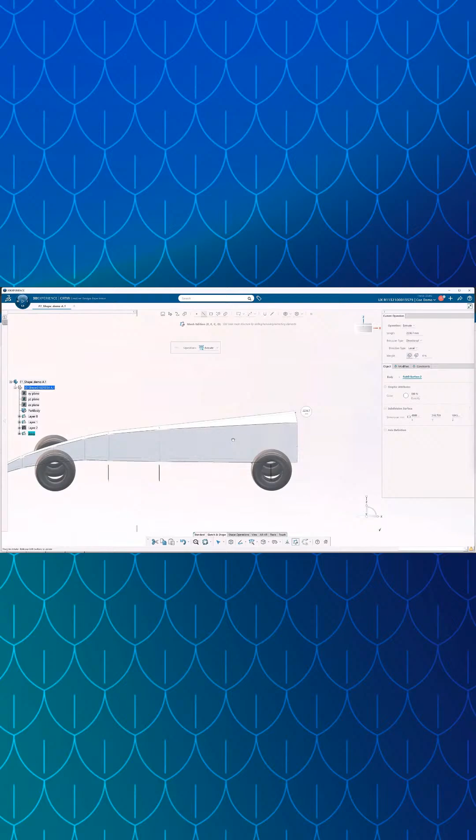This application is dedicated to early stage concept design because it combines subdivision surface technology with intuitive tools. Designers and modelers can create high quality 3D shapes from scratch with freedom during creation. We can start with a simple context like the wheel position, and also from a box primitive that you'll be able to deform using manipulation commands.

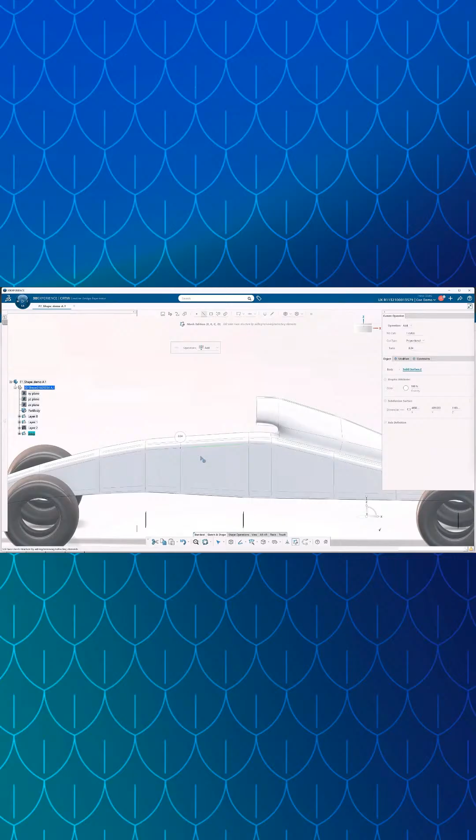Here you'll be able to sculpt the base mesh interactively, and the subdivision will be detailed progressively. The shape will evolve naturally while designers and modelers keep full control over the proportion and flow of their surfaces. For fast exploration and refinement, you can use the gesture-based tool that accelerates your workflow, since you can select vertices and quickly sculpt the shape and make adjustments quickly.

You can see that the full body of the Formula One was created with a symmetry modifier, which allows you to create only one side of the product and see the overall shape at the end. So here the concept model is complete, and it will be the base and reference for the next step of the design phase.

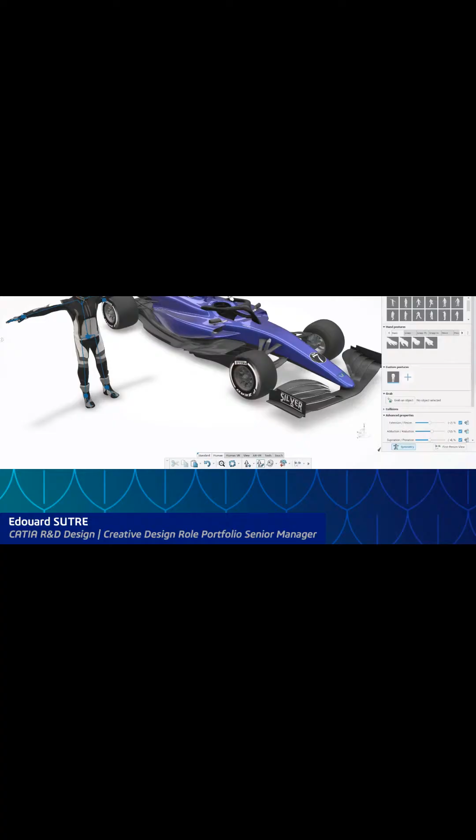We can start to imagine the cockpit inside, and I'll let Edouard show us that. Now we'll talk about the virtual mannequin. In most of our CATIA roles, you have access to an application called CATIA Human Design, and it's on purpose - we are convinced that having the virtual mannequin available for all designers will be key for the future and for doing the best design possible.

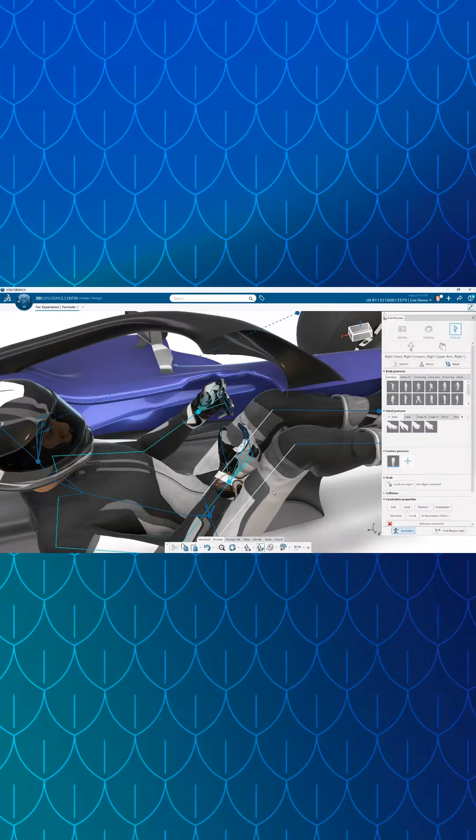The idea is to propose an easy-to-use and flexible mannequin available in the project, representing the driver, the pilot of the Formula One. You can easily drag in 3D some interesting key points to put the mannequin into postures that represent the use cases we have to serve in order to design around this reference. Same also for the visibility line.

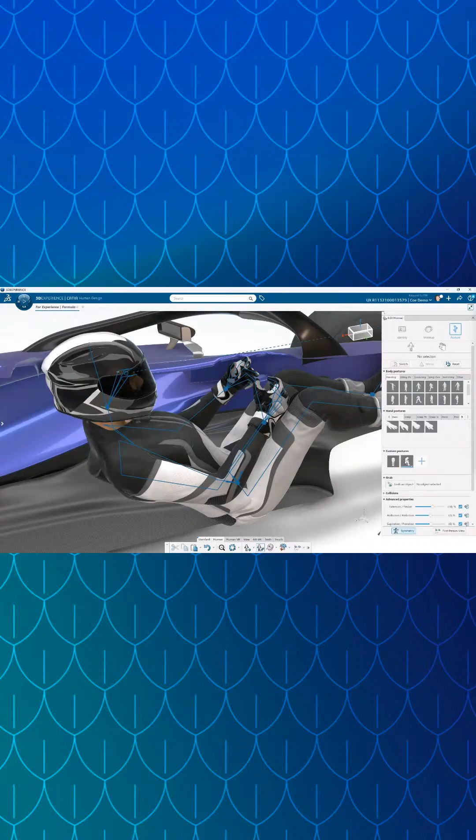With one button, we can have the first-person view access in order to visualize what the driver will see. We can also capture different postures to challenge our design all over the project with these different postures. And then the mannequin is ready.

I also want to show you what the new web widget, Creative Portfolio Board, is meant to be used for designers.

So to start the ideation phase, once you have all the context created, you can use a Creative Portfolio Board and ask Aura, our conversational agent available directly on the 3DEXPERIENCE platform, to provide the latest Formula One regulation rules related to the steering wheel.

This gives us access to up-to-date information, and we will be able to create the full design brief based on key technical constraints, such as the size and safety requirements of a steering wheel. So at this first step of the design, we keep these real constraints in the process.

You can copy-paste them inside the Creative Portfolio Board, but also add images to create mood boards using templates to organize your images by theme or by color. This helps us make sure our steering wheel will be very close to the real needs, for example the different functions and buttons that we will need.

At one point, I can also insert the first sketches that are ready inside the board and use a compare command, placing the two concepts side by side. This helps us evaluate options and make better decisions. With the icon, we can select the concept we want to continue, but this time in 3D. It's a good tool for designers and modelers to understand and collaborate all along the project.

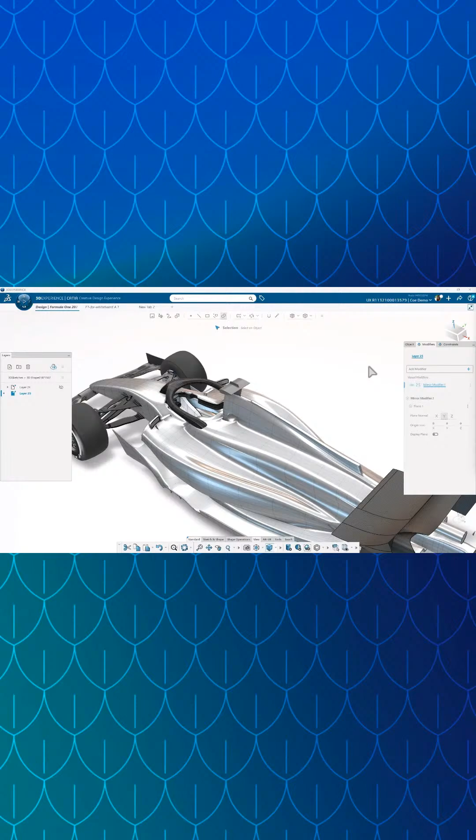I want to position inside the Formula One to have the best visibility while I sketch. So here I'm using the clipping tool to create a section in the Formula One body, taking the pilot's point of view to design my steering wheel.

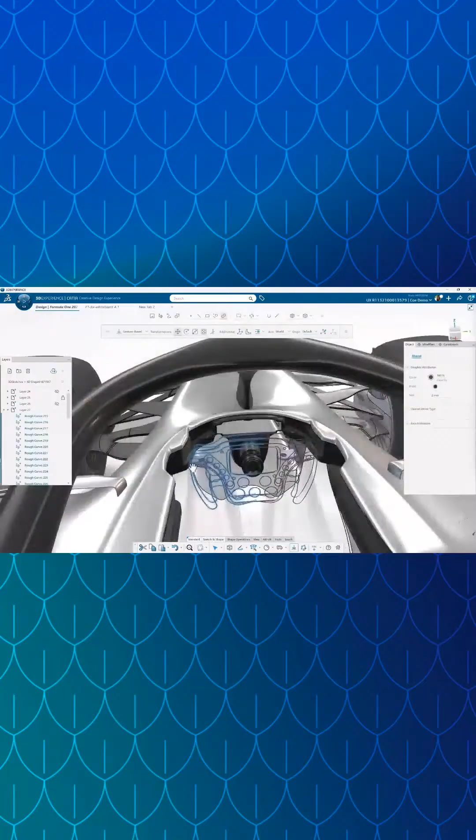Here I can place a drawing plane in 3D space and start 2D drawing directly in context. I can choose the colors and thickness of my sketch, quickly move these sketches in space, and continue to change my point of view to create the full sketches in 3D.

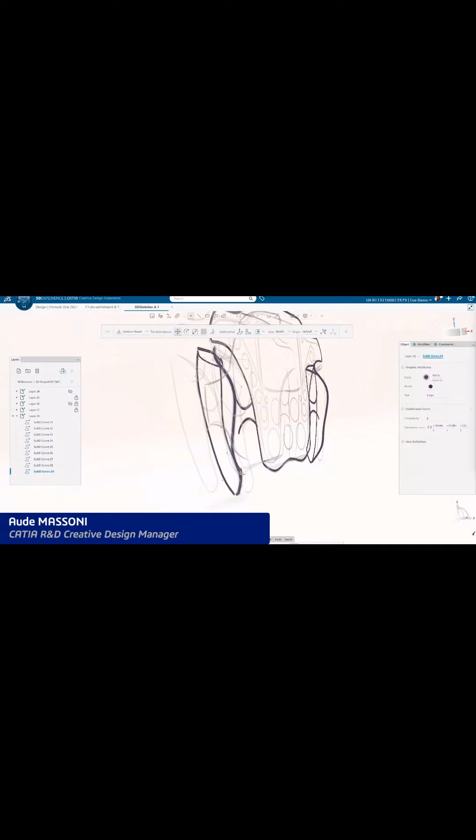Once it's done, I can switch to subdivision curve technology. These are real CATIA curves that I'm drawing here, and I can combine multiple curves to create a complex shape and refine, for example, some area of the handle with the manipulation command. You see, it's very fast, but also precise.

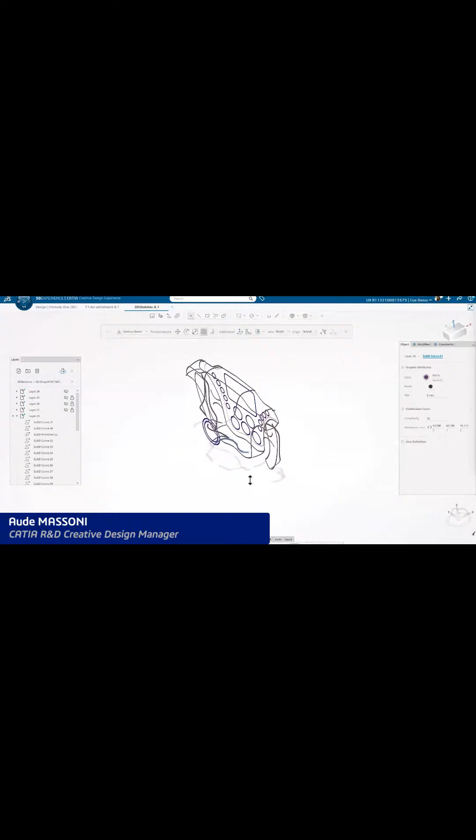I can change the point of view and sketch on different drawing planes to create a full 3D sketch network. Here I'm also using some primitives to define the buttons, and designing the position of the screen of the steering wheel, as well as the connection that I will need to the rest of the cockpit at one point.

With the 3D sketch directly integrated inside the Formula One cockpit, I can have a clear and realistic view of my concept. This allows us to quickly assess the design quality and the first level of ergonomics, and also to check technical feasibility before moving to the surface modeling.

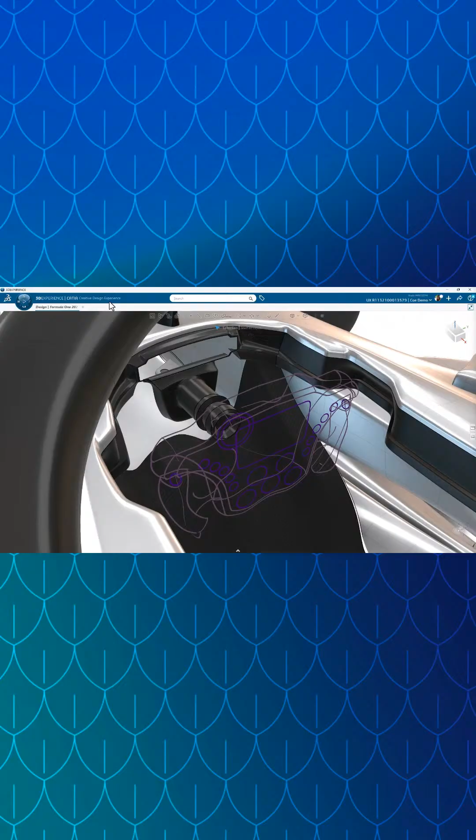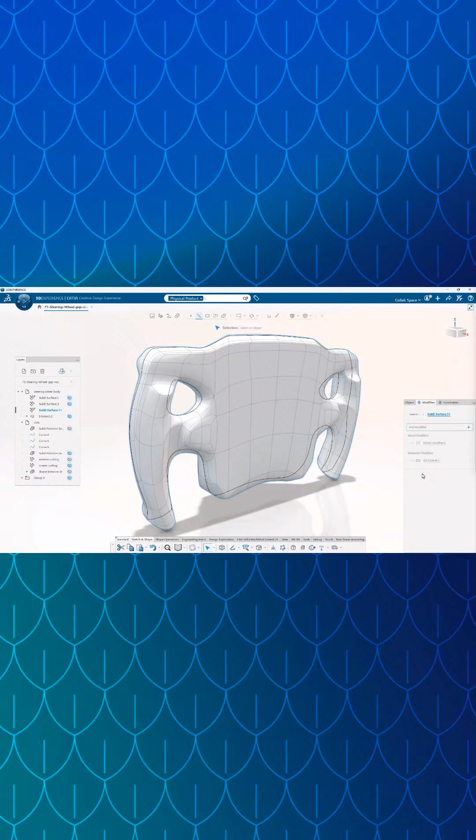To switch from the 3D sketch to the concept model, I use the same command as for the Formula One body design. Here I want to focus on some new modifiers that we propose in our application, which allow designers and modelers to enter the refine step of their concept with more control and flexibility.

Here I'm using a gap modeling modifier that will allow you to automatically create gaps on top of your surface using simply some input curves.

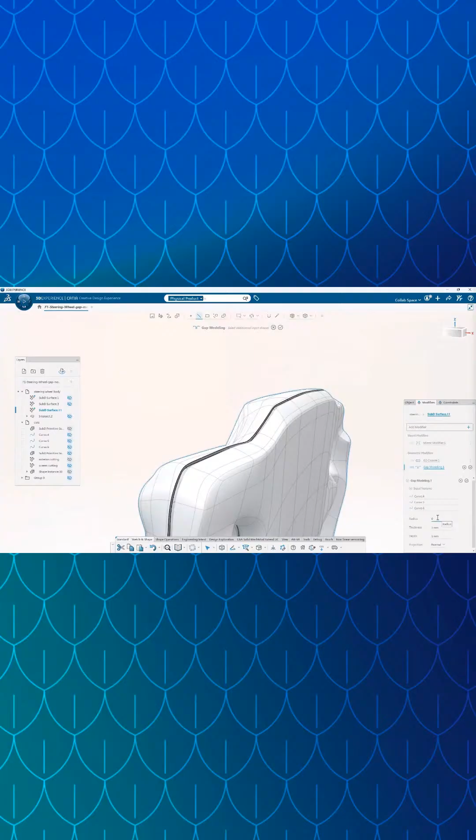So here I selected a bunch of curves that are close to my shape, and you can see it automatically proposed some gap modeling. I only need to enter the parameters I wish to have, like the thickness, the depth, but also the fillet radius that will follow the edge of the gap.

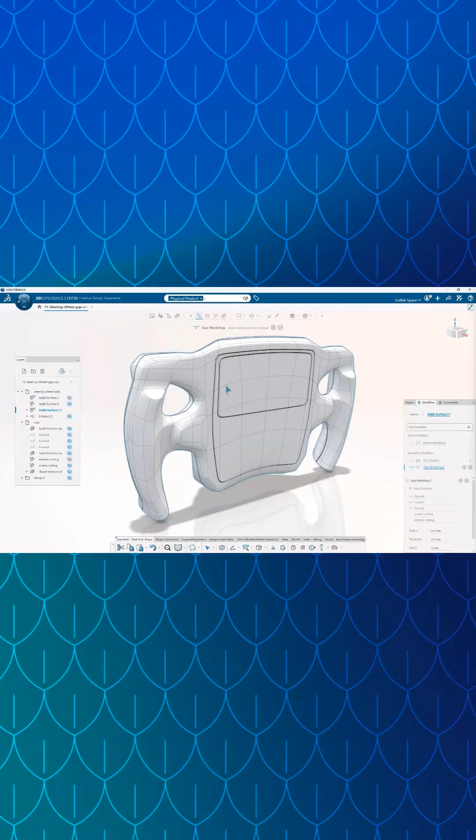Because it's a modifier, you can at any time edit it, for example to add new cutting inputs. Here I'm adding two new surfaces to define the area where I want the steering wheel screen display. And because everything stays associative all along the way, I can show back my input features and go into manipulation.

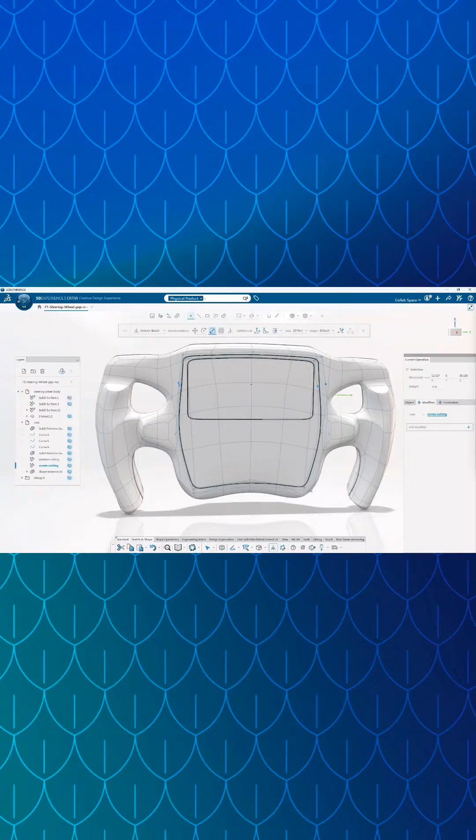Here I will select some key vertices on the shape and scale it down a little, and you can see it will automatically update the cutting and the gap will be regenerated automatically. So it's saving a really big amount of time for designers, and they can focus on exploring their ideas and design variations by simply adjusting these parameters. It's very fast and flexible for the need.

For this project, we also tried to prepare additional templates in order to add a lot of details in a short time frame. For that, we used CATIA visual scripting.

So here, for example, the idea was to prepare some primitives on the steering wheel. Sorry, Aude? No problem, I can show it after.

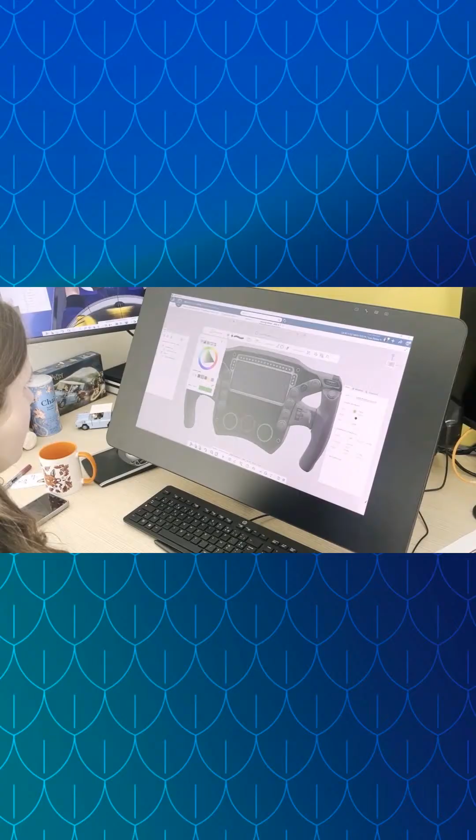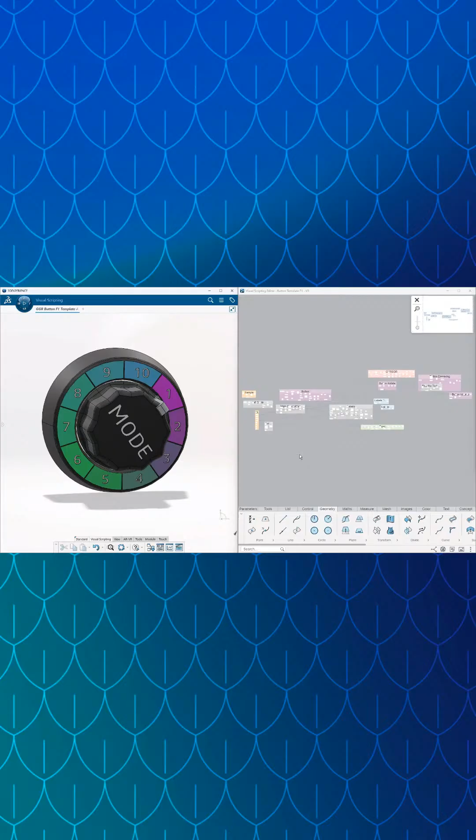So in the story, Aude, the creative modeler, has created some circles in order to represent the positions of the different buttons. And in CATIA visual scripting, we have prepared a template, a parametric model driven by a lot of parameters in order to capture the best practices and modeling techniques.

Visual scripting is a visual programming language offered to CAD and CATIA users and designers in order to prepare generative models, really robust with a lot of logic inside, in order to be used as potential templates.

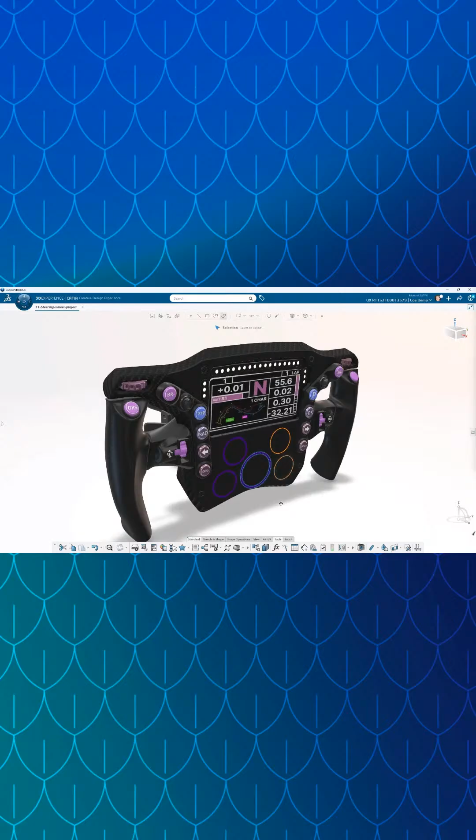Here you can see that Aude was able to simply reuse from catalogs and libraries the existing templates, and you have this kind of interface. This is similar to Power Copies and user features in CATIA, in order to instantiate them with a direct access to input selection and parameters.

You can see we just have to select the different circles, and the template will automatically adapt to the different sizes. We can enrich the model quite easily using this design sequence approach made with CATIA visual scripting.

What is also interesting, you still have access to the main parameters of the templates using this experience view, tailored for designers with a simpler kind of interface, access to different parameters such as colors, the number of quadrants you want, or even the word you want to put on the button. And you can even capture design variants through this interface.

Thanks. Yes, I will just go back here to show you how we use also all along the project still a 3D portfolio board.

So here we wanted to do a design review with Edouard. We were able to integrate, for example, a first 3D sketch inside portfolio board, and you can visualize your model, turn around, and also do some measurements in it.

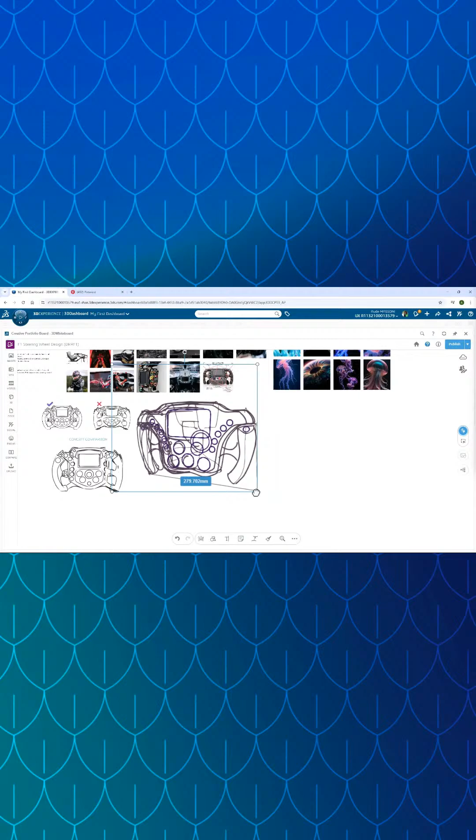It's also very nice to create the mood boards as we saw earlier, but also to start to propose and show the project to other teams and explore ideas, for example for the HMI that will be displayed on the steering wheel.

And also start to show how the steering wheel will be used in context of our pilot inside the cockpit. So here the human serves as a communication tool to explain and put in situation our concept, even at this early stage.

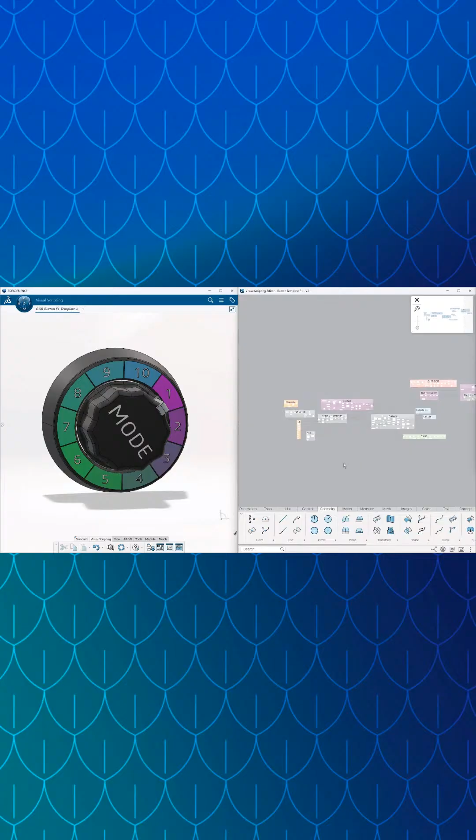Now that we are happy with this first level of virtual steering wheel, we want to bring this virtual into the real world with a physical prototype.

So here I will show you how to use CATIA 3D printing preparation app. It's an application to help you check the model and export it for different purposes like 3D printing.

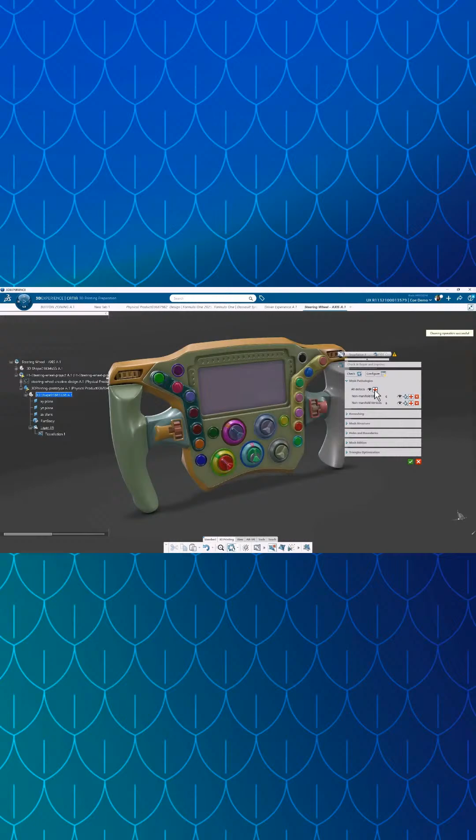So you mesh the model, and after a mesh analysis, we went to the 3D experience lab where we prepared the model for a 3D printer, which is a filament 3D printer, because it's a first prototype. So we don't need to be really precise, but just to have the overall proportion and position for different elements to be checked.

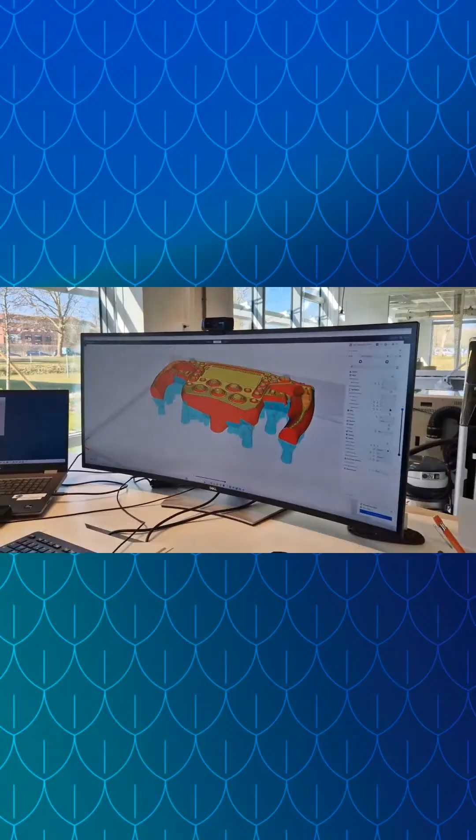So here we just do the parametering of the print, like how much support and the density, so the prototype will be strong but also fast to produce for our test.

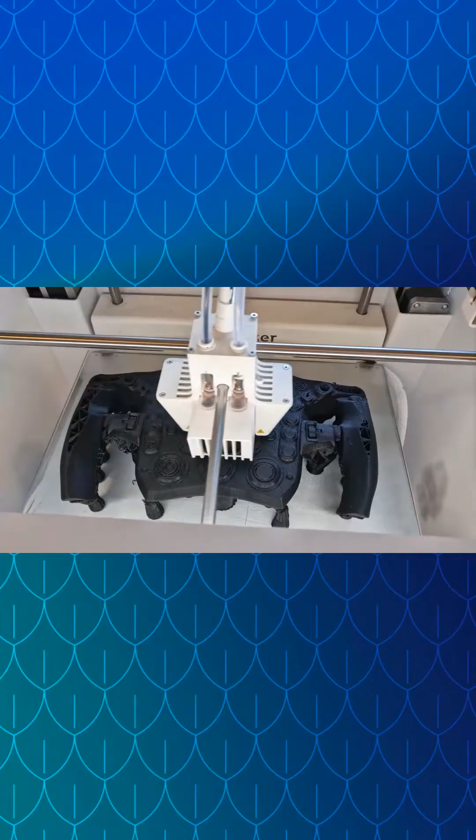So here, of course, this first prototype is a key validation step for us because we will be able to run a real user test to check the button positioning and accessibility, and also check how the steering wheel feels in hand, and here validate the screen placement, also the proportion, and move from ID to real user feedback.

So here Edouard tested the model with gloves, so it was a good way also to notice the realistic driving condition that it will be when it's inside the Formula One cockpit. So it's really fast to check the basic ergonomy and to be more confident to go to the next design phase.

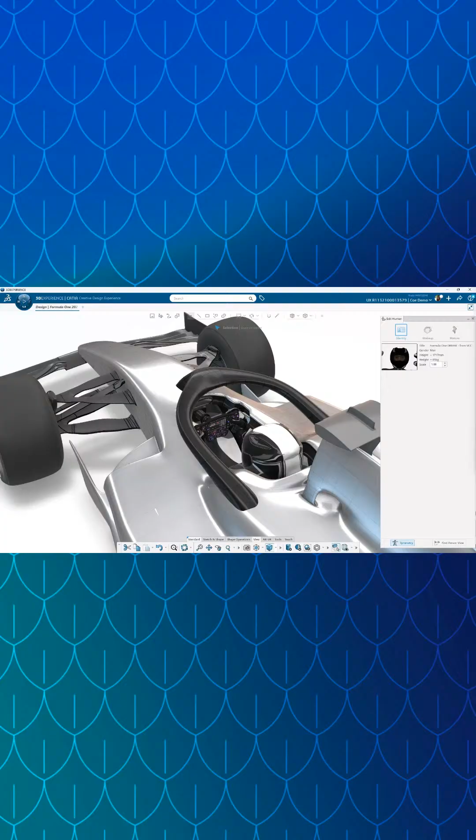So once it's done, of course, we want to go back to the virtual model and do the modification. But we can't afford each time to go to physical prototype. So the human was key all along the process, because we used the virtual mannequin to validate the modification on the fly. So here I'm back in CATIA Human Design application, and I can switch to first-person view to take the point of view inside the cockpit.

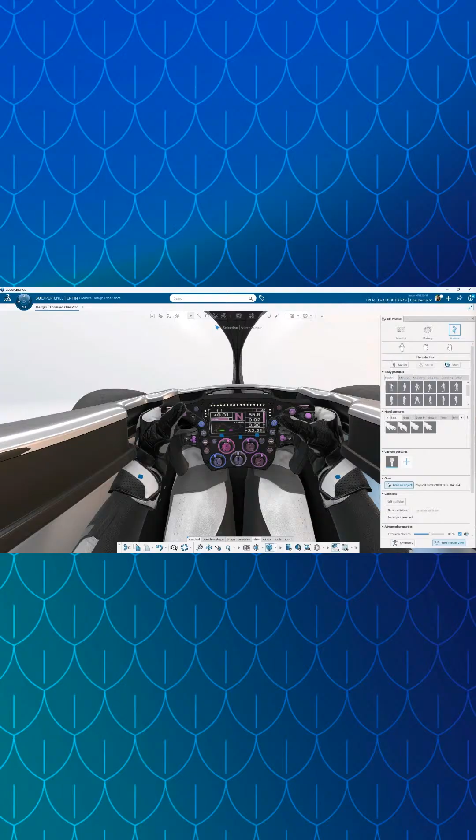With the automatic grab functionality, I can simulate the hand movement around the handle, and here I will activate the collision detection, so we will be able to spot any issues while interacting with the model. So here you can precisely move each finger to visualize which area of the hand will be touching the handle, the button. We can simulate the movement also of the pilot when he will be reaching to the steering wheel.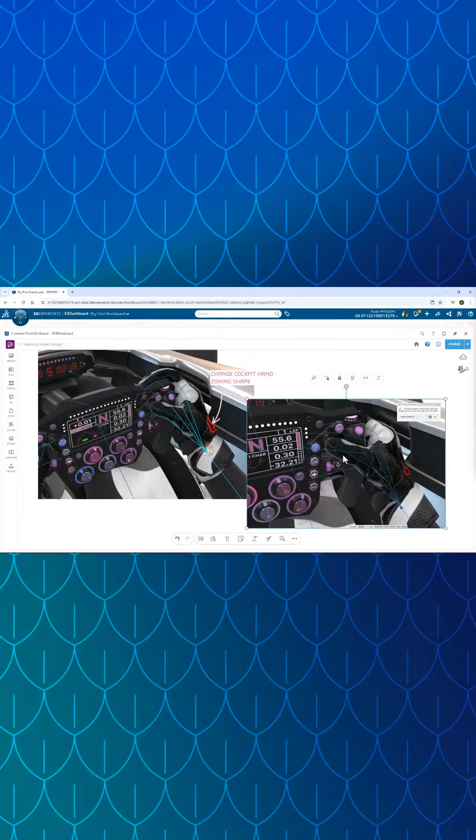Here we notice there is a very big collision with the cockpit. So we can capture this needed improvement and inside Creative Portfolio Board, paste the screenshot. It's a good way to track issues because you can also annotate to precisely say where you want a design change. For example, here I can highlight this part of the button and say, okay, I want to move them on the side to make them more accessible.

So I continue the analysis. I can check each usage scenario, and from the library of posture, you can also define specific posture for hands to quickly switch between this posture and also take other decisions.

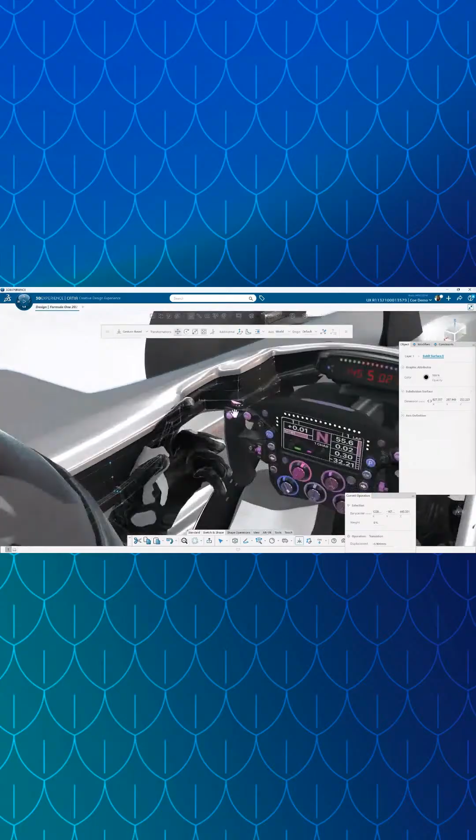So now let's see how Human Animation Studio helps us design the right user experience, but directly in the context of the animation. So here I've recorded an animation of my human, and while I'm launching the motion, it's still possible to go to Creative Design Experience application and adjust manually the subdivision to make sure that the mannequin motion will fit perfectly with no collision while doing the movement.

So here I think this integrating workflow is a really very best example to show how it's very important to design the experience for the driver by combining the evaluation of the motion directly while manipulating the 3D shape and making design choices in real time.

So now we want to jump into a collaborative review session in our VR room, because we will run a mixed reality user test by blending the physical prototype we just printed and the virtual prototype that we refined.

So here we can mount the physical model on top of a car simulation cockpit. And with the Varjo XR3 headset, it's possible to see what is the virtual steering wheel on top of the physical one. I can, of course, interact with other team members in real time to make decisions in collaboration.

So I let Edouard show you how to do this virtually as well. Yes, so it's another possibility offered with our products. It's also possible to incarnate the mannequin in virtual reality.

And for that, we were also able to use our latest feature regarding hand tracking, the finger tracking support. So with a specific headset such as Varjo, it's possible to not have to use anymore the physical controllers, and we will automatically track the motion of your fingers. And this way, you can really experiment freely with the product in virtual reality and record everything using the motion capture features offered in the application.

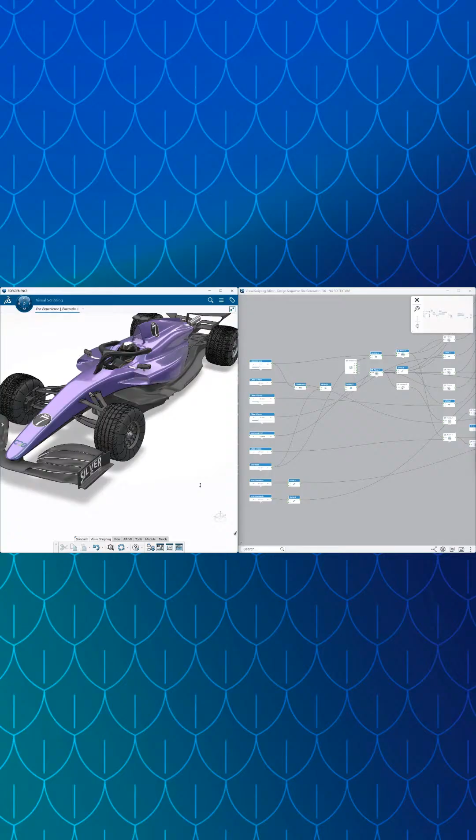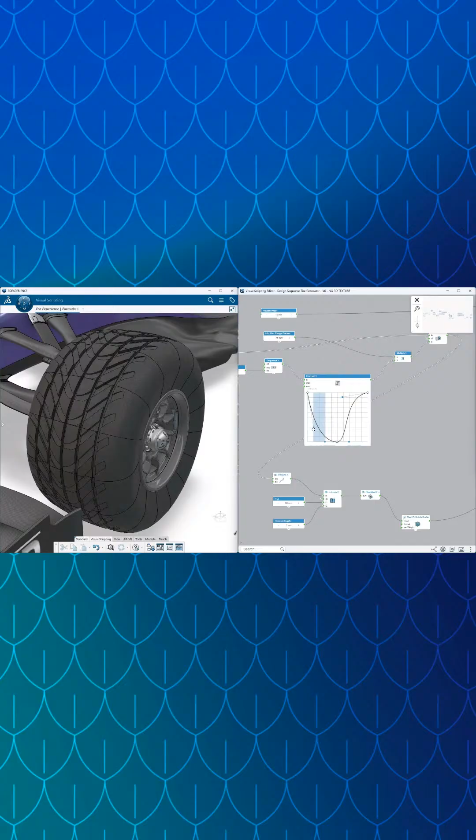And it was an additional part here, not really related to the cockpit, but in this project we also used CATIA visual scripting for the tires. We explored a parametric and generative model to have a lot of different design variants available through parameters and configurations. The idea was to explore easily the impact of the shape of the tires, and we can combine this approach with simulation on top of the 3D Experience platform to reach the optimal shapes for the best performance in the race.

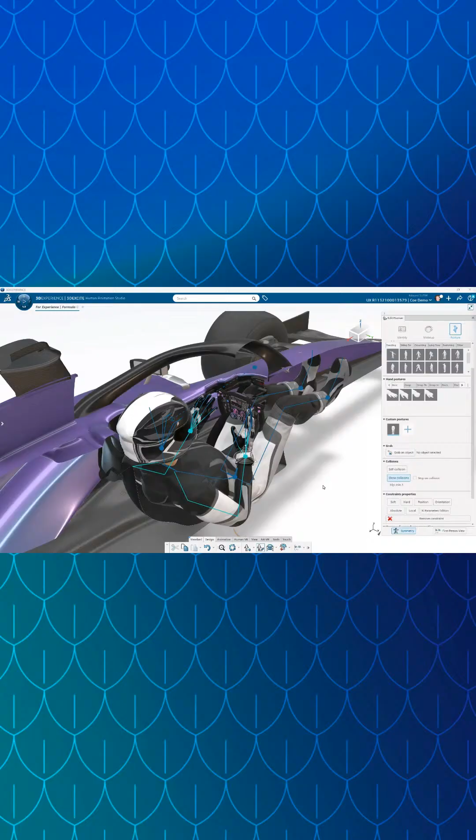Now we are back with the virtual mannequin. I think it's time to do a second loop of virtual validation. So here again, we will use the same kind of features, automatic grab of geometries, in order to put the hand on the steering wheel.

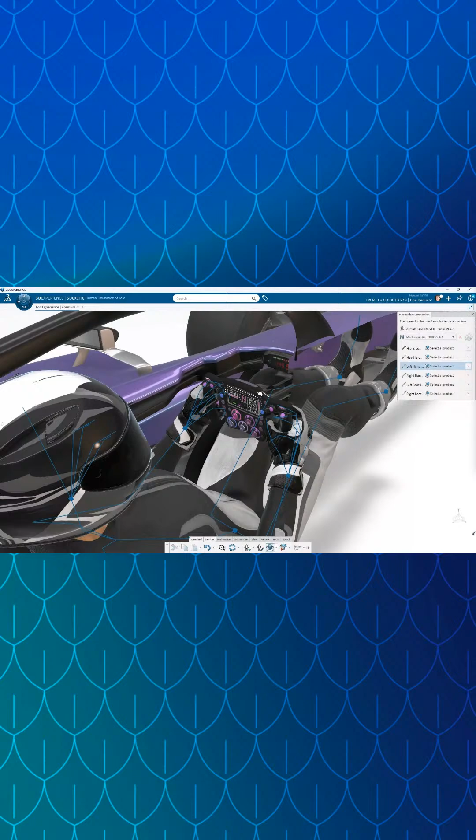The cockpit has reached an interesting level of refinement, and we are able to connect the virtual mannequin to an existing mechanism. We will select the steering wheel, and the mechanism associated to it will work connected to the virtual mannequin. This way we can validate the full kinematic loop, including the driver, and it will help detect additional issues during the workflow.

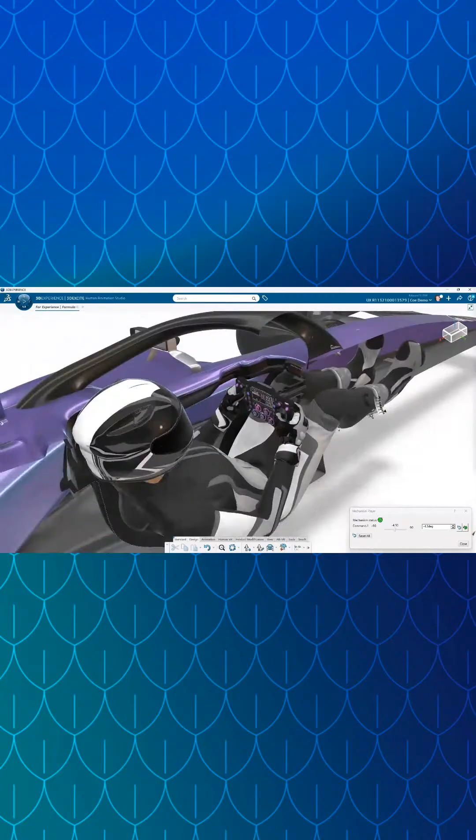And here, for that, we are also using the CATIA motion design application to prepare the mechanisms and to simulate the kinematic behaviors, for example to get some analysis plots or to generate an animation to be replayed in the product structure.

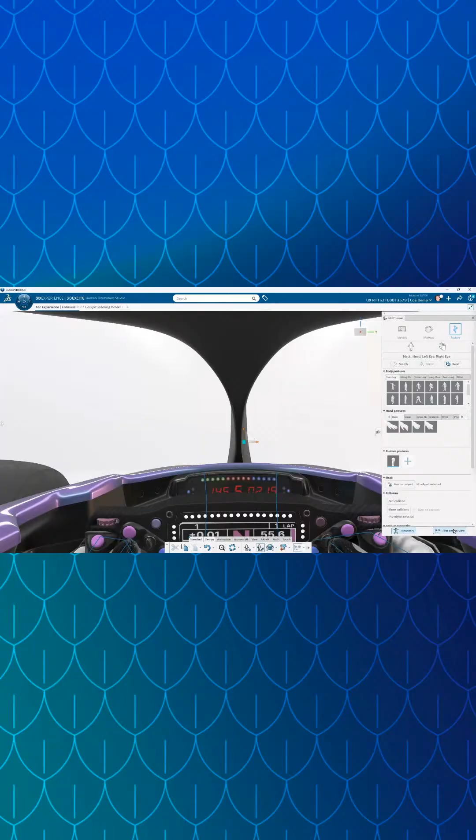And the last step was about the visibility offered in the cockpit. So one button to switch between a first or third person view. And here we are exploring now the positioning of the rear mirrors. You can see we are trying to move the head to the right to see if the positioning of the rear mirror and the geometry is well placed or not, in order to get the best view.

We will not go into the details of this part, but we can imagine using CATIA live rendering and ray tracing technologies directly in this interactive session in order to validate if we are really seeing what the drivers expect during the race, and if not, go back and modify the design and the positioning of the elements.

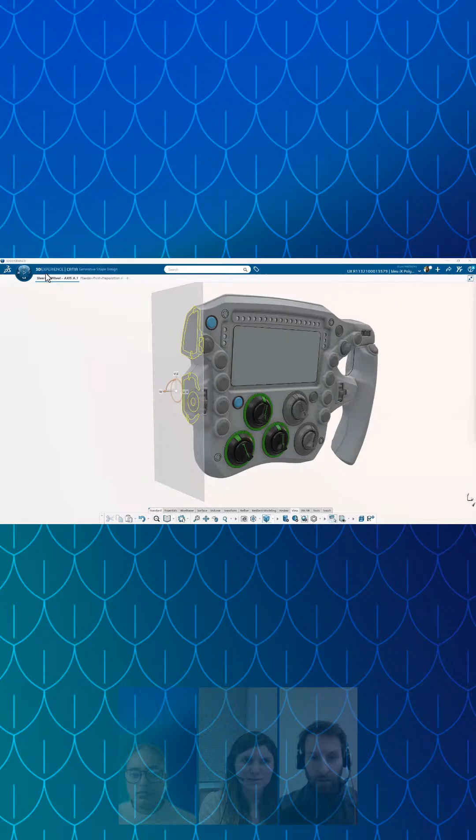So I think now, Aude, you will talk about 3D printing again. Yes, it's really impressive to see all these steps again. And of course, after all these validation steps, we want to go back to physical.

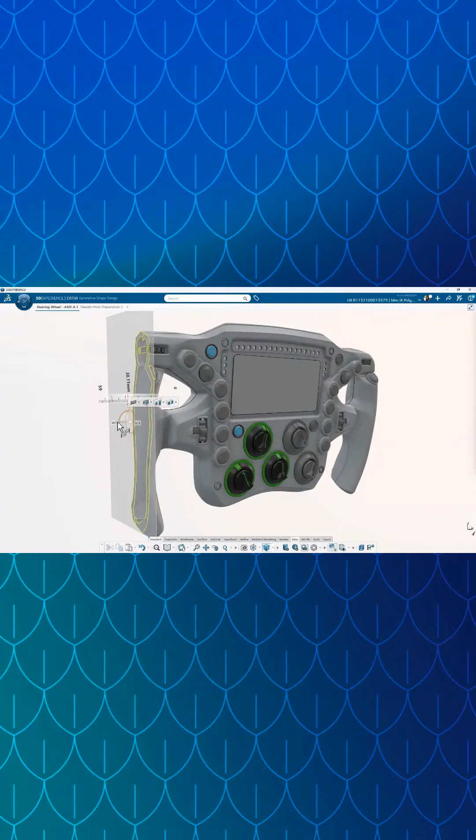So we want to print again a new steering wheel, but this time with another technology. We chose a powder-based 3D printing technology because it allows producing a prototype made of different parts and creating the assembly afterward. So here the buttons and the wheel will be printed separately, with another level of surface quality, that will be better to check the small details and the interaction with the end user.

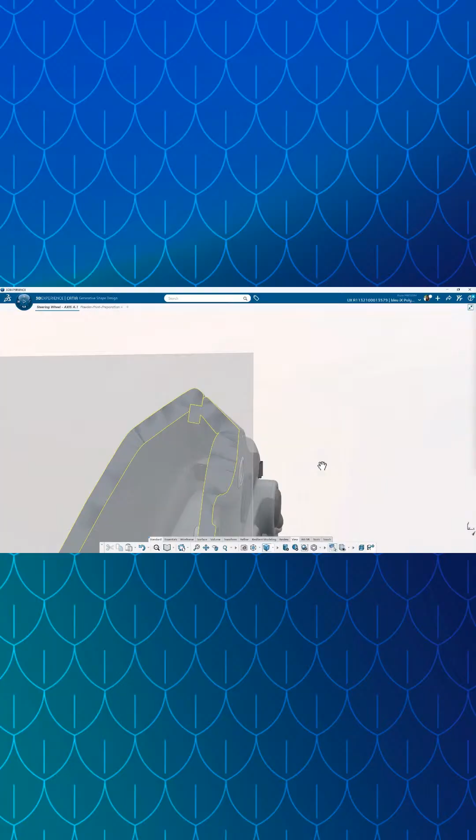So let me show you the final result of this prototype at scale 1. Here you can see we printed both parts of it. For example, for the engineering team, it will be possible to check that all the elements that go inside will fit our design. But also, you see I have the buttons that are not attached here, but you see the little button here, you can turn them. So we have another level of interaction and check of the design.

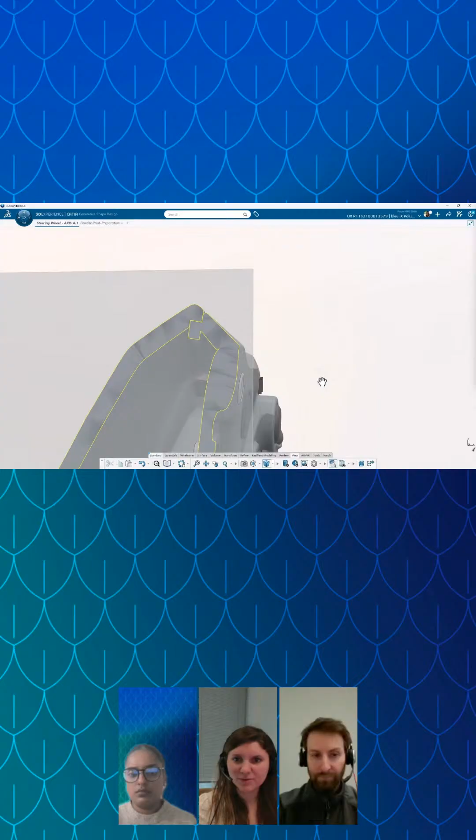So next step, Edouard, is to reveal the final project. So it was for fun, but in visual scripting we also have soft body behaviors embedded in the application, and we wanted to do a kind of virtual reveal using a cloth simulation on top of the Formula One. So this is the result we get with the full team and the full project of last year, including design and engineering departments. And we were quite proud of being capable of creating such geometry all together on the same platform.

And we are not Formula One designers and experts at all, and also to be able to reach such kind of project with our current solutions and tools. It was quite intense and really interesting. And I think it was also kind of a proof of this new approach we wanted to showcase, including the virtual human really at the heart of the virtual and the design process.

And you can see such images were also produced using CATIA live rendering. So even the images, we were able to create them from the CATIA tools and CATIA applications directly in the 3DEXPERIENCE platform. Yes, in the situation of the racing itself, finally.